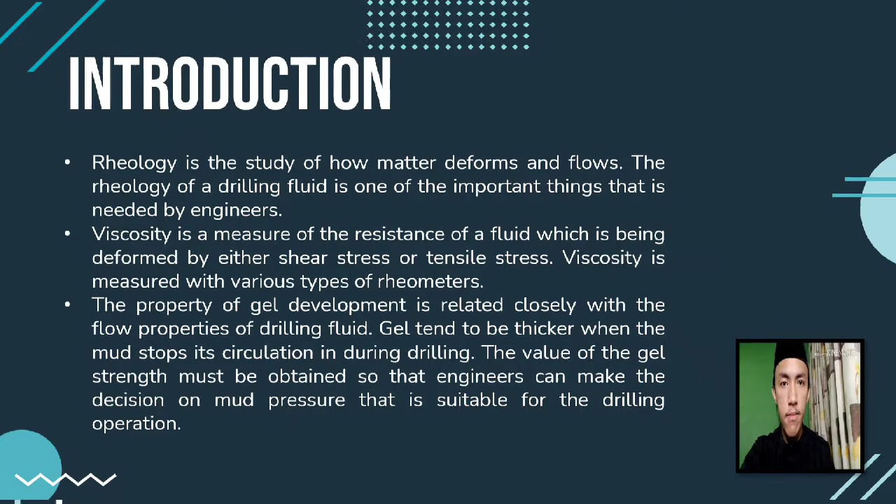Now we are moving on to the objective of the experiment. The first objective is to determine the viscosity, gel strength, and yield point of each sample used, which is the oil-based mud and the water-based mud. That is for part A of the experiment.

For the second objective of the experiment, it is to measure the funnel viscosity of drilling mud by using the marsh funnel, where the samples used are water-based mud and also the oil-based mud.

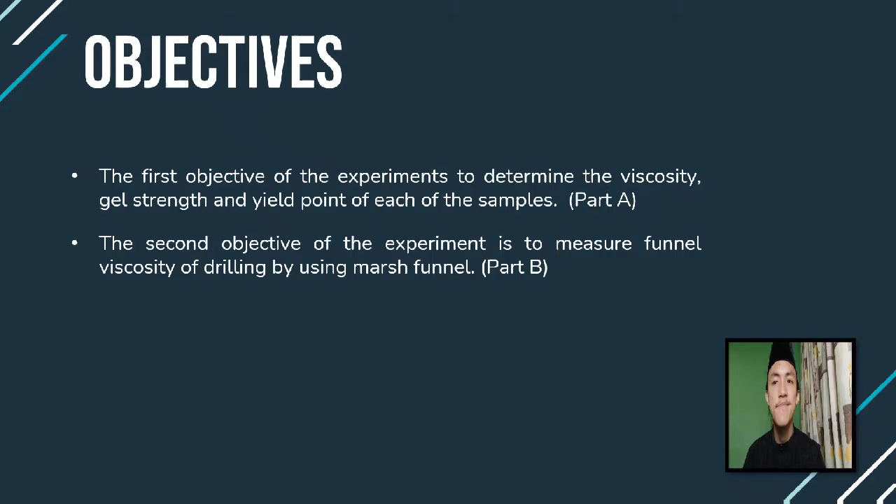For the theory part, as we know, viscosity is a measure of the resistance of a fluid which is being deformed by either shear stress or tensile stress. It is measured as the ratio of the shearing stress to the rate of shearing strain. In this experiment, the viscosity was measured by using a baroid viscometer.

Gel strength is a function of interparticle forces. Gel strength was measured by using the baroid viscometer in unit pound per 100 square feet.

First, mix the water-based mud under 600 RPM for 3 minutes, then rest for 3 minutes, then mix again under 3 RPM. The first reading deflected was taken as the gel strength reading.

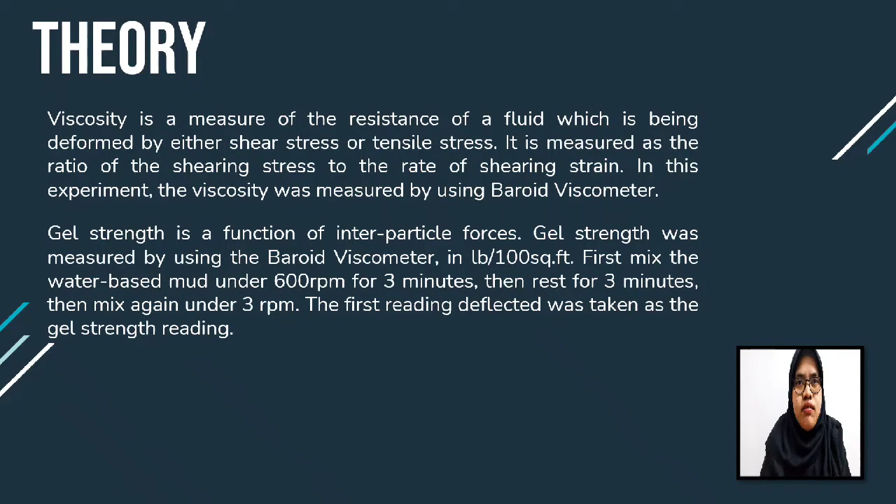Yield point, which is YP, is the resistance of initial flow of liquid or fluid, or the stress required in order to move the fluid. Simply put, the YP is the attractive force among colloidal particles in the mud.

Yield point can be calculated by using this formula: YP equals the reading from a viscometer at 600 RPM minus the reading from a viscometer at 300 RPM. The unit of YP is pound per 100 feet square.

In water-based mud, the YP will increase with high temperature environment, contaminants such as carbon dioxide, salt, and anhydrite in the drilling fluids, and also overtreatment of the drilling mud with lime or caustic soda.

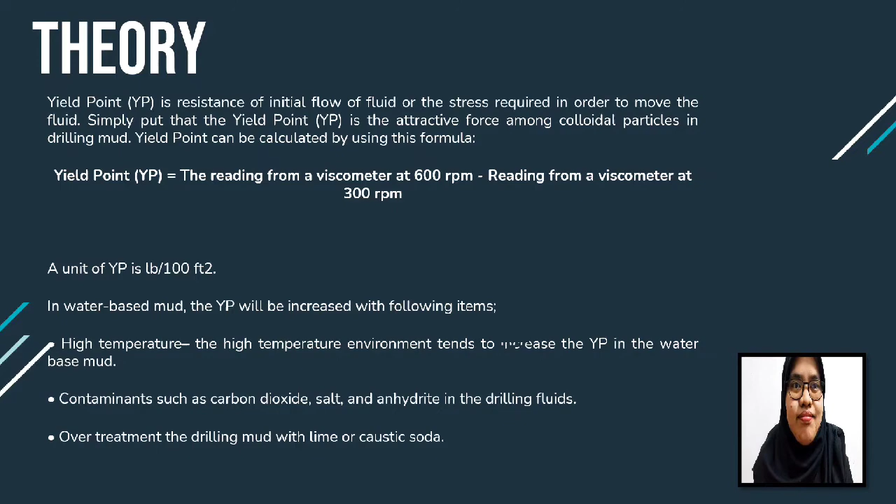For apparatus and material, part A, which is rheological determination using viscometer, uses a baroid viscometer with mud samples, water-based mud and oil-based mud, and a mud mixer. For part B, determination of marsh funnel viscosity, uses a marsh funnel with receiving cup, mud samples (water-based and oil-based), and a mud mixer.

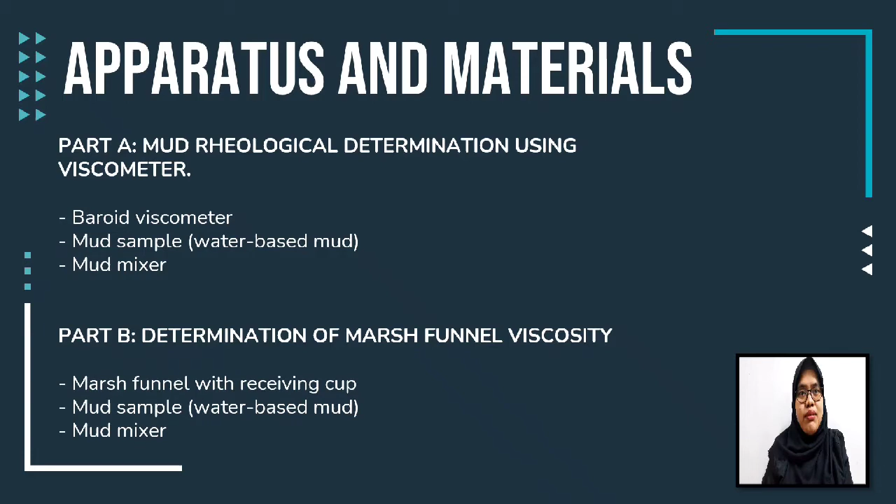Next, the procedure for this experiment. Basically there are two parts: part A and part B. Part A is mud rheological determination using viscometer, which includes three experiments: viscosity, gel strength, and yield point.

For viscosity, step 1: test fluid is stirred at low speed for 5 minutes using the Hamilton Beach mixer. Next, the drilling fluid is poured into the sample cup to the level corresponding to the predetermined bob length.

With drilling fluid in the cup properly placed in the viscometer, the rotor sleeve is immersed exactly to the scribe line. Next, the test fluid is sheared at 600 RPM until the dial reading reaches a steady value, after which the stabilized dial reading is recorded in descending order at 600 RPM and 300 RPM. Each dial reading is recorded before changing to the lower speed.

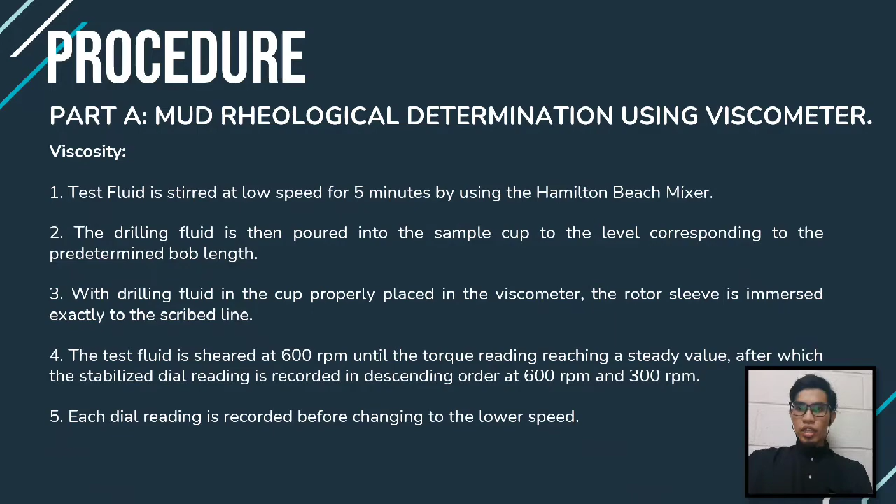Next experiment is gel strength. First, oil-based mud is stirred at 600 RPM for about 1 minute. Next, allow the mud to stand undisturbed for 1 minute. Then switch the RPM knob to 3 RPM, and the maximum reading is recorded. Repeat the step for water-based mud.

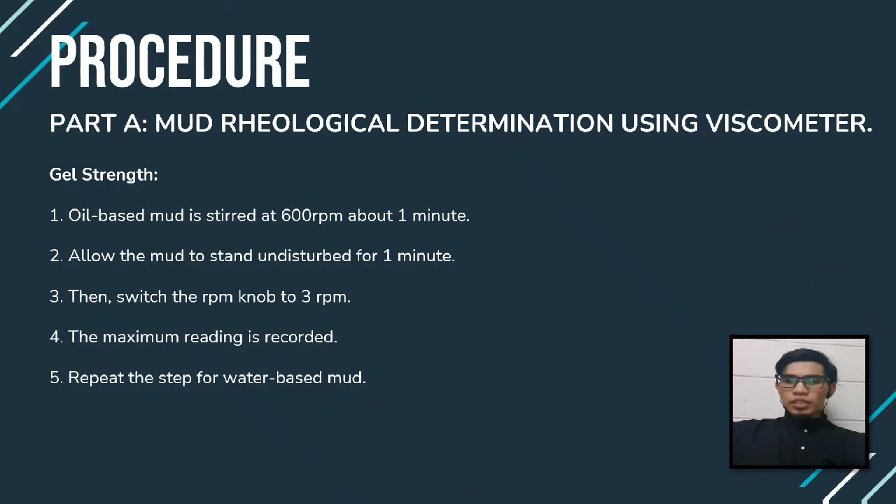The last experiment for this part is yield point. First, the dial reading of water-based mud is recorded at 600 RPM and 300 RPM using the viscometer. Then the yield point is calculated using the formula: the reading at 600 RPM minus the reading at 300 RPM gives the yield point value.

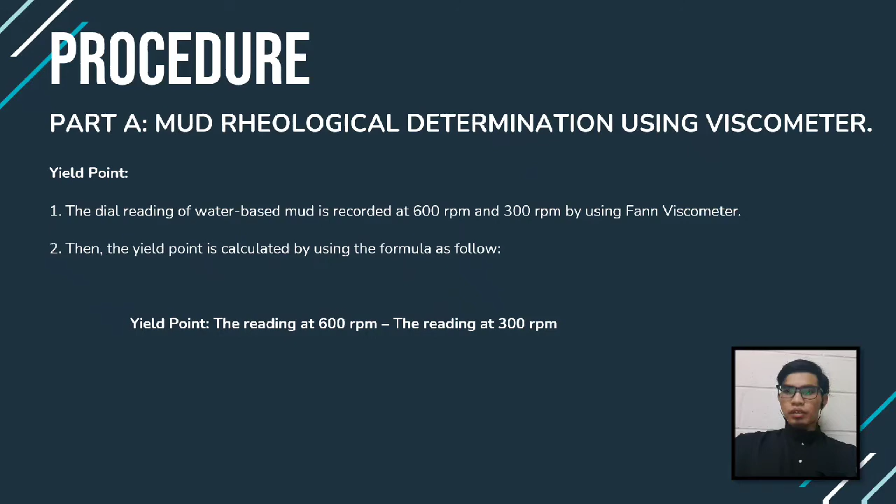Part B, which is determination of marsh funnel viscosity.

First, the marsh funnel is covered with a finger in an upright position. Next, 500 ml of oil-based mud is poured through the screen until the mud exactly reaches the bottom of the screen. The finger is removed immediately from the outlet and the time required is measured in seconds using a stopwatch.

Next, the experiment is repeated with volumes of 400 ml and 300 ml, and the number of seconds is reported as funnel viscosity. Lastly, change the mud to water-based mud and repeat the same steps.

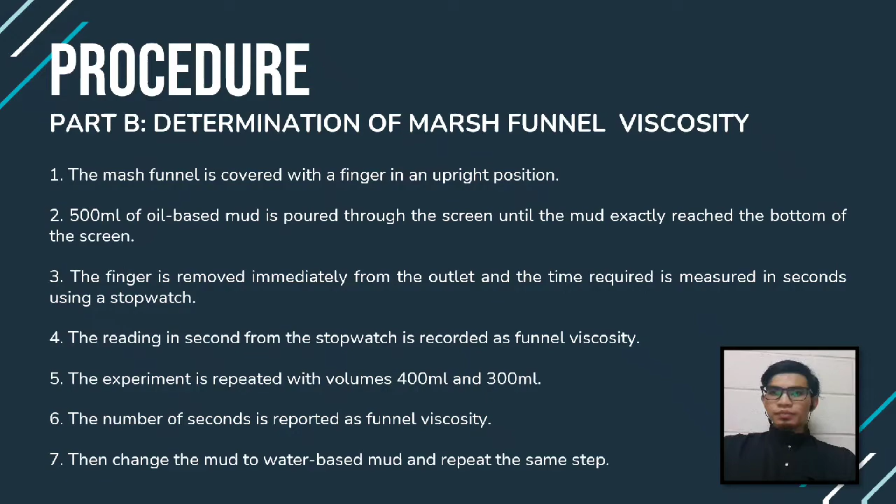Next slide is the result for Part A and Part B. For Part A, there are two results. The first is the result of the viscometer for oil-based mud and water-based mud. From the table, the value of plastic viscosity, yield point, and apparent viscosity are all higher for water-based mud compared to oil-based mud. For plastic viscosity, water-based mud is 2 centipoise compared to oil-based mud at 0.5 centipoise. The yield point for water-based mud is 35, higher compared to oil-based mud at 4.5. The apparent viscosity for water-based mud is 18.5 centipoise, higher compared to oil-based mud at 2.5 centipoise.

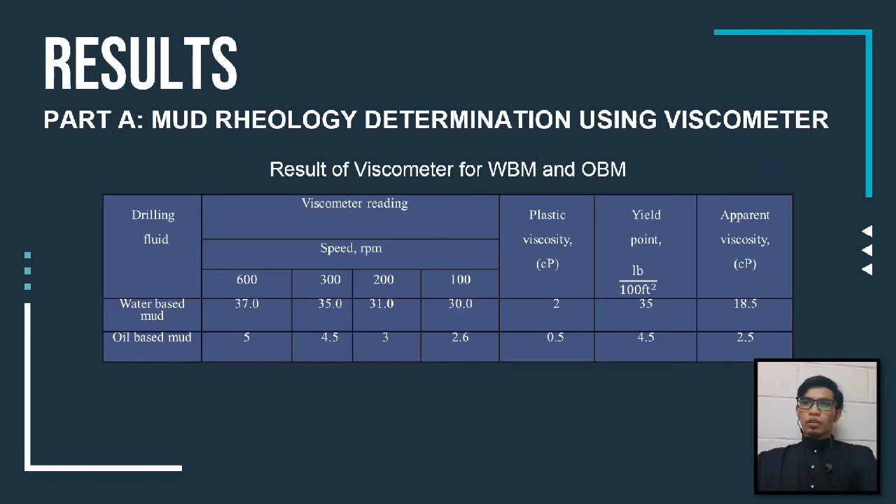The next result is the gel strength for water-based mud and oil-based mud. From the table, the gel strength for water-based mud is also higher compared to oil-based mud: water-based mud is 45 and oil-based mud is 12.

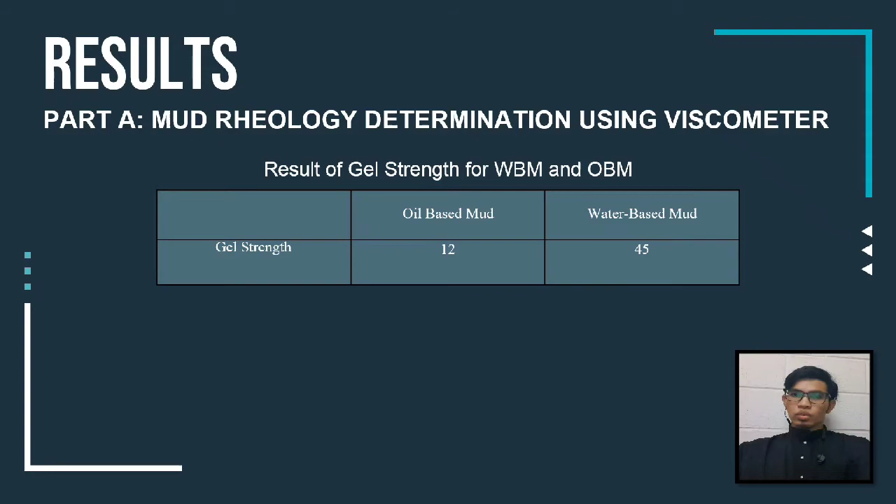Next, Part B. As we can see, the average time for water-based mud is higher compared to oil-based mud. The average time taken for water-based mud is 38 seconds, higher compared to oil-based mud at 27 seconds.

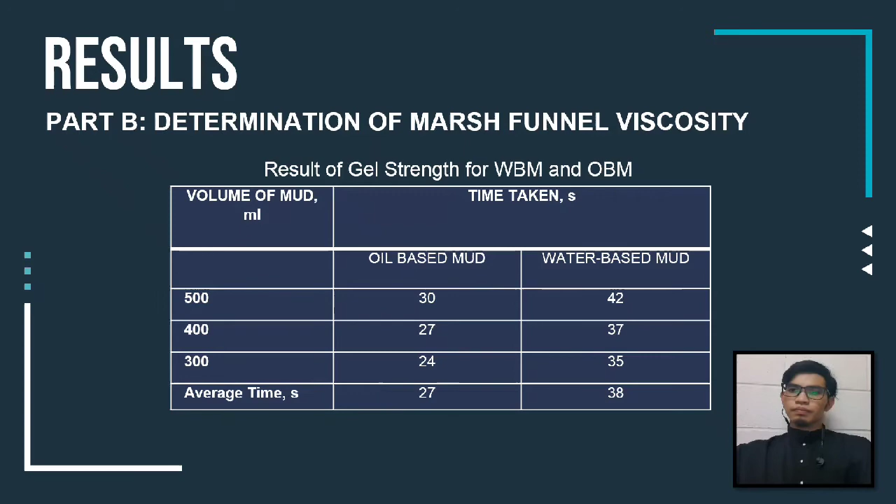Next, this slide will show the sample calculation for Part A and Part B. For Part A, there are three values that need to be calculated: plastic viscosity, yield point, and apparent viscosity.

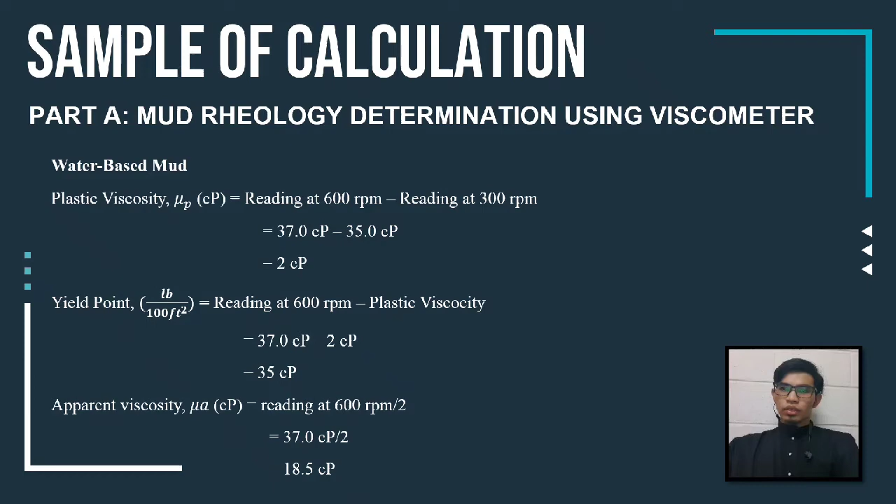For water-based mud, to calculate the value of plastic viscosity: reading at 600 rpm minus reading at 300 rpm, which is 37 centipoise minus 35 centipoise, equals 2 centipoise for plastic viscosity. For yield point: reading at 600 rpm minus plastic viscosity value from the first calculation, so 37 centipoise minus 2 centipoise equals 35 centipoise. Lastly, for apparent viscosity: reading at 600 rpm divided by 2, and the answer is 18.5 centipoise.

The next slide is the calculation for oil-based mud. The calculation is the same as for water-based mud.

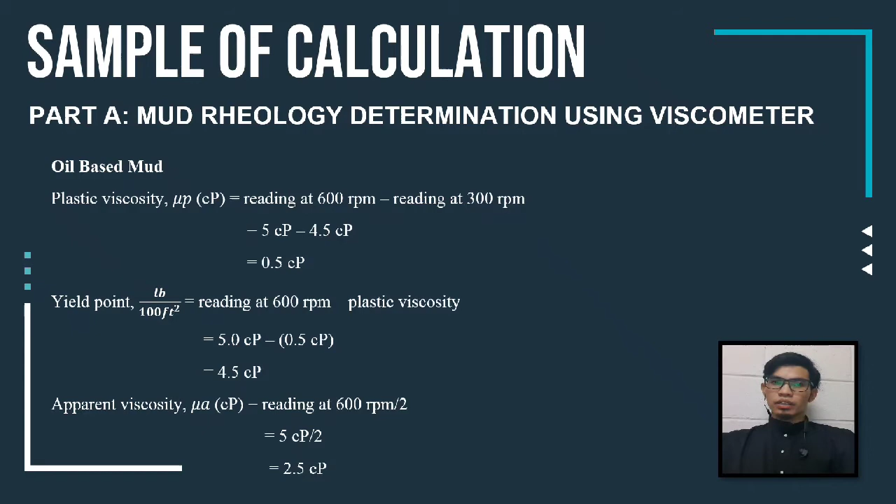Next slide is Part B, determination of marsh funnel viscosity. There are two types of mud: water-based mud and oil-based mud. For this part, the calculation involves the average time. Since there are three different volumes, we add them and divide by 3 to get the average. For water-based mud, we get 38 seconds, and for oil-based mud, 27 seconds.

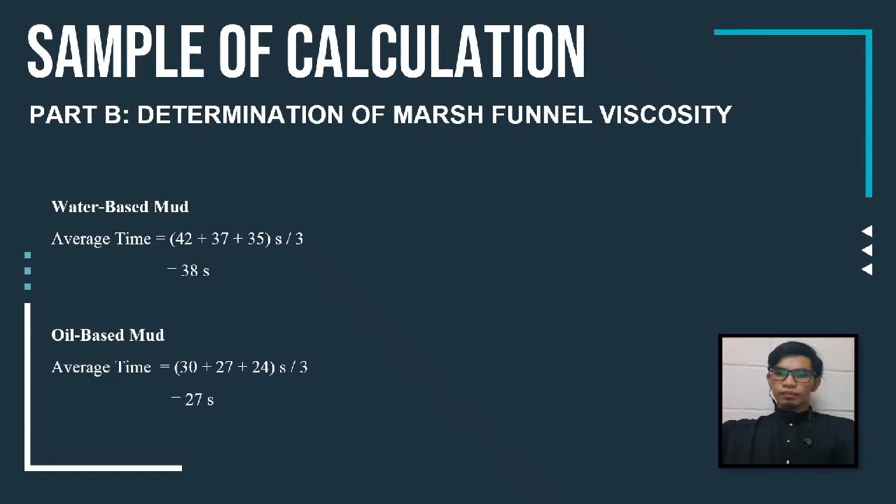From the experiment we conducted, based on all the results and calculations, for water-based mud, the viscosity at 100, 200, 300, and 600 rpm are 30, 31, 35, and 37 centipoise respectively. The plastic viscosity is 2 centipoise, while apparent viscosity is 18.5 centipoise. The gel strength is 45 centipoise, and the yield point is 35 pound per feet cube.

For oil-based mud, the viscosity at 100, 200, 300, and 600 rpm are 2.6, 3, 4.5, and 5 centipoise respectively. The plastic viscosity is 0.5 centipoise, while apparent viscosity is 2.5 centipoise. The gel strength is 12 centipoise and the yield point is 4.5 pound per feet cube.

Primarily, all drilling fluids, especially drilling mud, can have a wide range of chemical and physical properties. These properties are specifically designed for drilling conditions and the special problems that must be handled during drilling. The purposes of drilling fluids include cooling and lubricating the drill bit. It also removes cuttings from the well and controls pressure to prevent blowout. Drilling mud can also help solve drilling problems including lost circulation and stuck pipe.

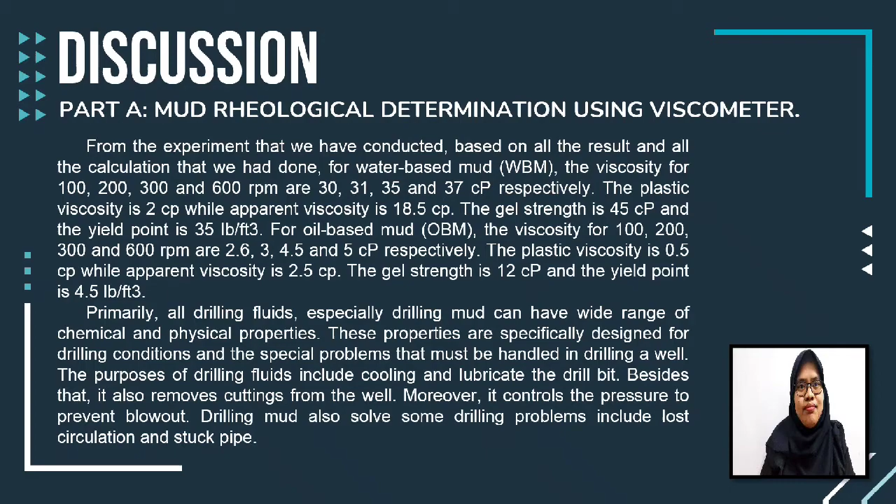Plastic viscosity (PV) controls the magnitude of shear stress developed as one layer of fluid slides over another. It is a measure of friction between layers and provides a scale of fluid thickness. With liquids, plastic viscosity decreases with increasing temperature, but the reverse occurs with gases. Any increase in solid content in the mud, particularly solids or lost circulation material, will result in higher plastic viscosity.

In order to lower the PV, you must reduce the solid content, which can be achieved by using solid control equipment and/or diluting the drilling mud with base fluid.

With increasing temperature while drilling deeper, the plastic viscosity of the drilling mud will decrease because the viscosity of the base fluid decreases. Normally, the higher mud weight, the higher PV will be. However, if you have an increasing trend of PV without mud weight change, it means there is an increase in ultra-fine drill solid content in the mud system. Moreover, if you use oil-based mud, keep in mind that emulsified water in oil-based drilling fluid will act like a solid and increase the plastic viscosity dramatically.

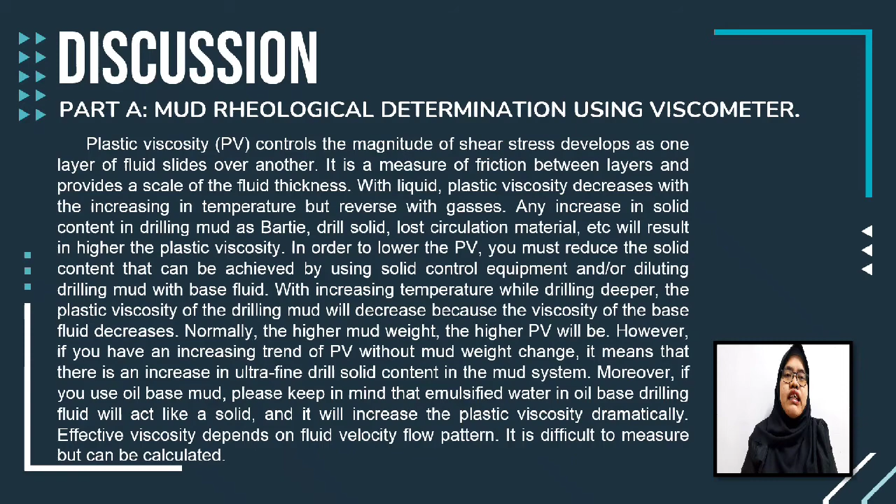Effective viscosity depends on fluid velocity and flow pattern. It is difficult to measure but can be calculated.

Gel strength is the shear stress of drilling mud measured at low shear rate after the drilling mud is static for a certain period. Gel strength is one of the important drilling fluid properties because it demonstrates the ability of the drilling mud to suspend drill solid and weighting material when circulation is ceased. If the mud has high gel strength, it will create high pump pressure in order to break circulation after the mud is static for a long time.

Furthermore, an increasing trend of 30-minute gel strength indicates a build-up of ultrafine solid. Therefore, the mud must be treated by adding chemical or diluting with fresh base fluid.

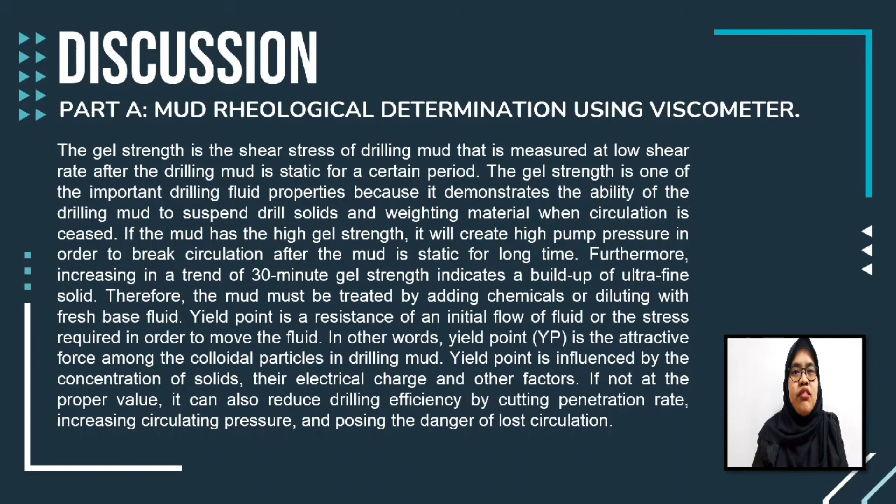Yield point is the resistance of an initial flow of fluid, or the stress required in order to move the fluid. In other words, yield point is the attractive force among the colloidal particles in drilling mud. Yield point is influenced by the concentration of solid, their electrical charge, and other factors. If not at the proper value, it can reduce drilling efficiency by cutting penetration rate, increasing circulation pressure, and posing the danger of lost circulation.

Now I will explain and present the discussion for part B, which is the determination of marsh funnel viscosity. So for the second part of the experiment, the objective was that we must measure the funnel viscosity of drilling mud by using the marsh funnel.

Viscosity is the measurement of thickness of a fluid, measured as the ratio of shearing stress to the rate of shearing strain. Funnel viscosity is measured as the number of seconds for drilling mud to flow through the marsh funnel.

Based on the experiment result, the average time taken for the water-based mud and the oil-based mud to reach the bottom of the screen are 27 seconds and 38 seconds respectively. It can be seen that the oil-based mud has a higher value of funnel viscosity compared to the water-based mud.

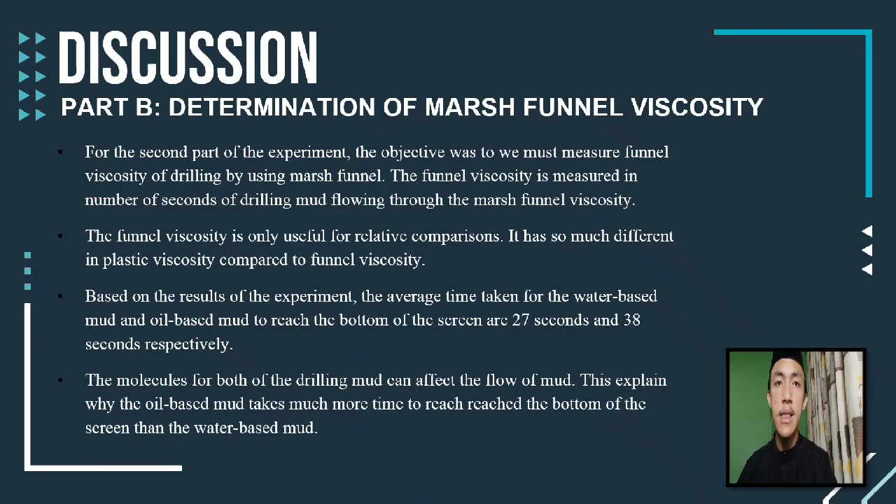In conclusion, the main objective of this experiment was achieved for both part A and part B. The main objective for experiment part A is to measure the rheology properties of the mud sample, which is the viscosity, yield point, and gel strength of the mud sample. For part B, the main objective is to measure the funnel viscosity, and then compare it with the plastic viscosity obtained during the experiment.

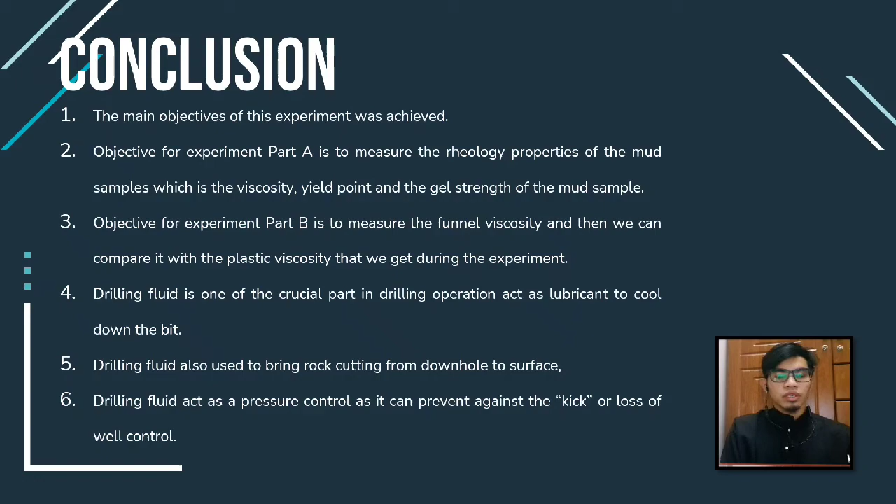In the petroleum industry, drilling fluid is one of the crucial parts of drilling operations. It can act as a lubricant to cool down the bit, and is also used to bring rock cuttings from downhole to surface. Other than that, drilling fluid also acts as pressure control, as it can prevent a kick or loss of well control. This is the reason why we need to control the viscosity of the drilling fluid.

For recommendations to improve the experimental process and achieve the experiment's objective, we need to ensure that the apparatus or viscometer are in good condition to avoid any error during the experiment. Besides that, make sure the mud is mixed properly using a mixer or stirrer to avoid undissolved material in the mud. Other than that, always check for error in the equipment reading before using it in order to give more accurate values needed for calculation.

Furthermore, in order to avoid errors during calculation, make sure to repeat the experiment at least 3 times to get an average reading. Finally, please ensure that you use a clean beaker before using it for the mud in order to get an accurate result. All these steps are important to ensure the most accurate result of the experiment can be obtained.